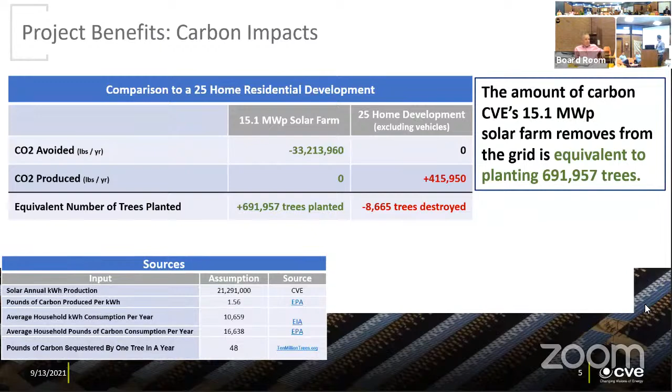Here's a slide on the tax revenues. This screenshot is pulled from the NYSERDA handbook on property tax, their recommended rates for property tax for solar projects in upstate New York, per utility. We're in National Grid territory, and they recommend $1,700 to $5,100 per megawatt AC. What we've been discussing with the attorneys and with the school district has been a rate of $5,500 per megawatt AC, already above NYSERDA's recommended range.

We've also discussed with the school district front-loading their payments, taking their 15 years of expected tax revenue and giving it to them up front. That would be $365,000. If you add it all up, it's about $800,000 in the first 15 years that this facility would pay in taxes, with the lump going to the school district and the rest split between the town and the county. We're happy to move around the funds with the host community agreement, which we can get into more detail on later.

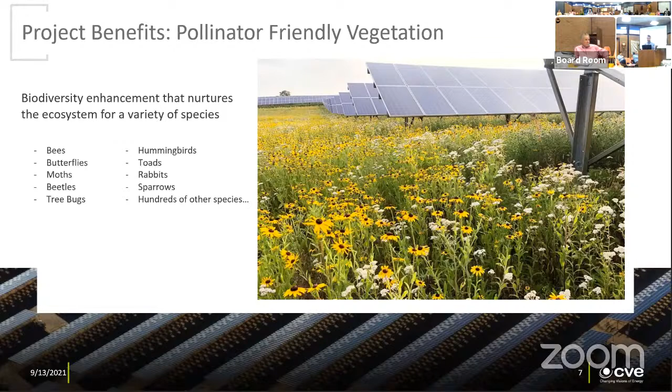Community solar: up to 2,500 individuals or homes could receive monthly discounts on their utility bills, a 10% discount, estimated to be worth $260,000 in year one. If you add it up over 25 years, that's about $9.5 million in utility savings for the community. We also have a little flexibility—given the rules of the community solar program, we can send up to 40% of the power to a single off-taker, a single customer. Instead of doing 2,500 homes, we could send 40% to a business in town, an industrial use.

So, Carson, is that $9.5 million nominal, or discounted over 25 years too? That's nominal, yeah—it's not present day dollars. All up.

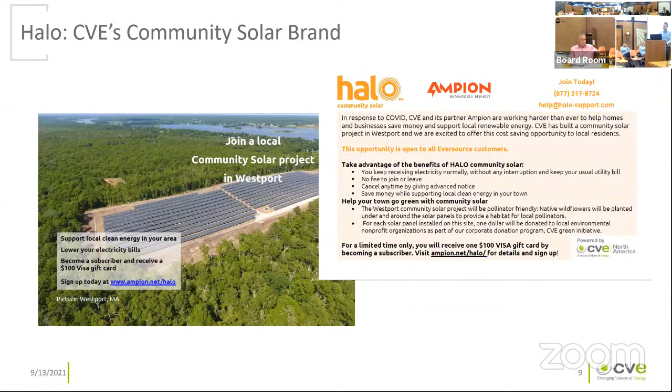Where are these panels manufactured? Yep, these panels are manufactured in South Korea by a company called Hanwha. Not in China, no forced labor—that came up at one of the meetings.

And then finally, something that's unique to CVE is we'll put together a board to come up with a local environmental cause to donate to—$1 per panel, something we do at every CVE project. So we'll be making a $35,000 donation to the local environmental cause or organization. Just wanted to get that out, refresh everybody on the project.

Thank you, Karsten. I was just wondering if you had received my questions, either over email or in the chat. They were sent to you, for each installation we do, but I had like 12 or 13 questions. You didn't get them? Did Ann Kelly email them to me directly? I'm sorry, I'm not aware. I'd have to look and see how that was.

It had to do with things like how you take care of the grass underneath the units, if they're sprayed, and removing snow from the units. How do you remove the snow? What do you do with it? So those are the type of questions I have, not just for this specific project, but for the other project we have too.

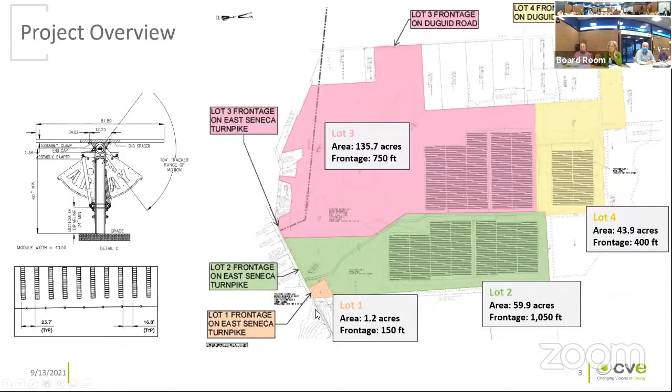And it was also explained to us that we're very close to maximum capacity, so even if it is a mile, we're not going to have a bunch that close together. I've heard that argument - people have said that to me, that look, we're getting close. We're talking about facilities that are 25 years in length, and a lot of things can change over 25 years, including capacity.

So I had asked that we put a cap on the amount of solar, a firm cap that is 50 megawatts, 55, whatever it is, as opposed to just saying that we're nearing our capacity, therefore we can't build any more, because a lot can happen in 25 years. And so I'm concerned about that too.

Carson, I have a presentation on that, on the siting. Wasn't a pretty big chunk of your connection fee upgrading National Grid's ability to handle the 11.5 megawatts? I almost gagged when I saw the cost for you to hook up. I was looking at upgrading the feeder subsets of it, and it looks like a lot of that is building up their ability to handle it, including taking your 5 megawatts down to 4.6, so you wouldn't overload the system when it was running full tilt.

I think the majority of our interconnection costs, which is about $2 million, is upgrading about a mile of power lines to accommodate this. So just to clarify, right now they don't have the capacity to take what you're generating, but with some additional investment, they could - which then creates the question in my mind that the capacity of the system today means nothing. Somebody could always put some money out there and increase capacity.

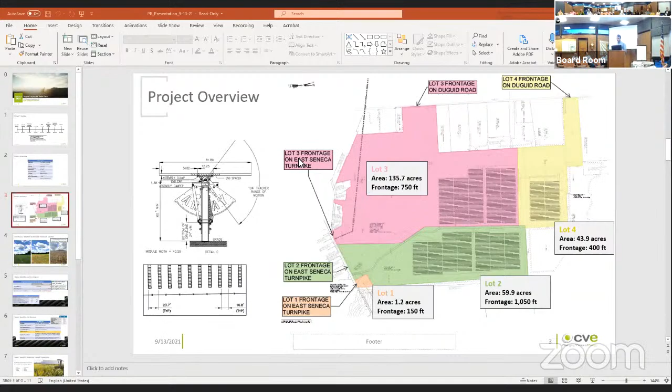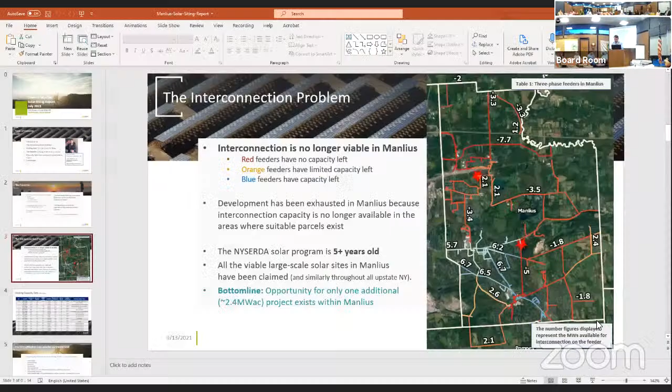So here is what I presented to the town board about the siting problem, out of the Manlius solar siting report. I was trying to prove to them with real data from National Grid, from the interconnection queue, that there's really no space left to do projects in Manlius. There's one spot in the eastern side of town that could do about a 2.4 megawatt AC project.

I quoted Rich Rossetti here: interconnection is no longer viable in Manlius. So those red lines, all these lines are all the feeders, all the distribution level power lines in the town of Manlius. All the red ones are power lines where there's no capacity available. The blue ones are where there is capacity available. There's capacity available on the power lines where it's congested, where it's developed, where the parcels are small, where there's homes and shopping centers. You can't get a solar project in there - there's no parcels, there's no space for it.

The numbers on these lines are the number of megawatts estimated to be available. So you can see that there's really nothing - where there is land, there's nothing left on the feeders based on what has been applied into the National Grid queue.

So can I ask a question? I hate to interrupt, but - does this mean that if we approve your project, the Salt Springs project can't be done because there's not enough capacity? I don't think so - that's on a different infrastructure, even though it's close, right? Already been through our...

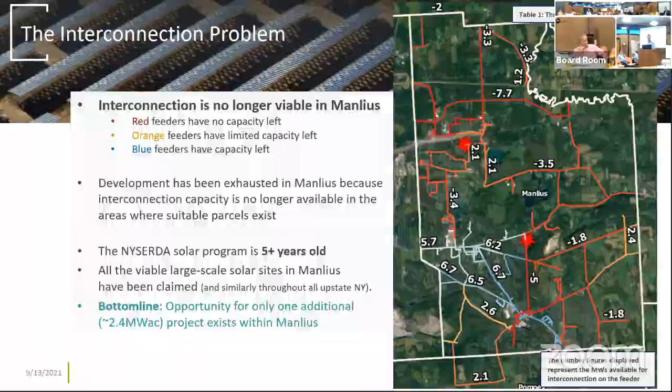Okay, yeah, both - I think you'll see these are all the power lines in the town of Manlius, their unique ID with National Grid, and the amount of capacity that they could potentially accommodate without upgrades.

So we're on this one - we could put 10 megawatts on with no upgrades. We could upgrade a little bit to get to 11.5 to really push it. And then the Source Renewables project is on a different feeder - Feeder 156, CVE is on 553. The Source Renewables project is going into the Collamer substation, we're going into the Duguid substation. So these are on a different set of infrastructure.

So this shows you the total solar on the feeder, the amount that this feeder could accommodate, then stats on the substation. So you see here what's available on the feeder and what's available on the substation - you need both of them to line up to have a viable site. So where there is capacity, there's some that do have some space, like these in blue.

But if you were to zoom in on this area where this feeder is, there's no parcels. The land use is restricted, parcels are too small.

You send that to Sarah Ballinger, that's head of this solar working group? Because that would be very helpful for our planning going forward. Yeah, she has it already. You could send it to the town board. Oh, you did already? Yeah, I did already, and I went through it with them.

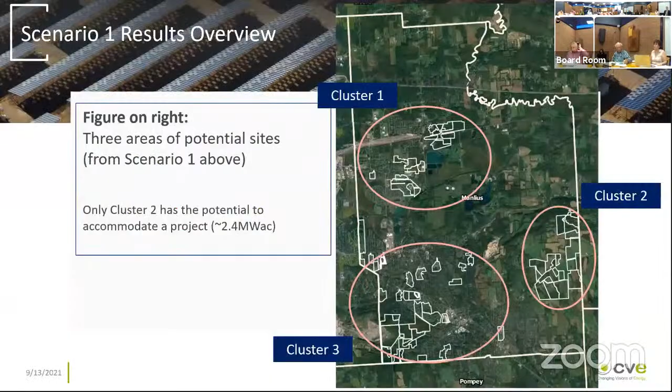This is my last comment, I won't say anything more on this project. This is just coming from me as I look at what's happening here. We've got the public hearing open right now. We'll probably close it or talk about closing it. But we have a subdivision. That is one of the pieces of the puzzle.

If we approve the subdivision, in my opinion, we then need to have 3 separate public hearings on site plans and special use permits for the different projects, because I'm of the belief there are 3 projects. Others may not agree with me. That's how I look at this thing.

I've been told that we can look at it as one project and do a site plan for all 3. I have never been involved, in all the years I've been on the planning board, we have never done a site plan on multiple projects at the same time, or multiple parcels, I should say. So I think we should do an individual site plan review of the 3 different parcels, not all together, but individually. Again, that's my opinion. I throw that out there, but I've never seen us do that in the past.

I spoke my piece. I think we're going to have to really come to... first of all, I would recommend tonight that we declare this a type 1 action. For that purpose, I can send out a single notice. It'll involve the subdivision, it will involve all projects, whether we end up bifurcating them or whatever we do later. So that would be my first recommendation for tonight.

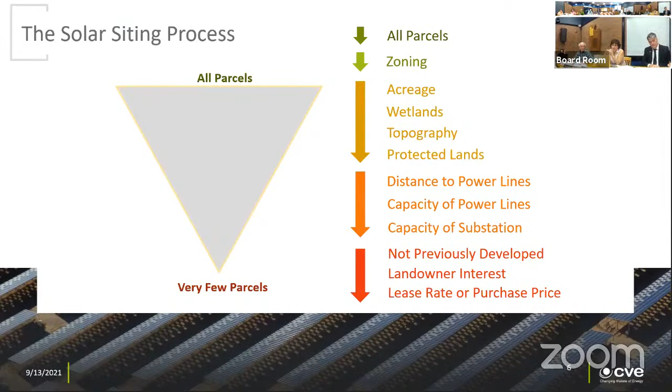The second thing is there needs to be a discussion amongst this board, because you guys are the only ones who are going to make that determination as to whether this is separate projects. Lastly, if it's determined that they are one project, I feel that we can look at them all at once, all as one. I don't have a problem with that from a procedural standpoint.

Even if they're separate lots, so to speak, separate parcels, I can work that and work the language.

But then the question is this: is it separate projects? If it is, we're going to have to make findings about that distance. If it's all one project, it appears we still may need a finding about the distance vis-a-vis the other project that's already in process. So those are just some threshold considerations.

I don't feel like we're back at square one. We certainly are not, but we're not as far along in the process as we would like to be. But it's the nature of this.

So at this point, do we have, Allison, more? Yes, okay.

Bill Rosinio says, how much carbon is emitted to manufacture and transport the panels from China? Do you consider that a part of the supply chain? And CVE is installing trackers, but they are showing land-based panels in the presentation.

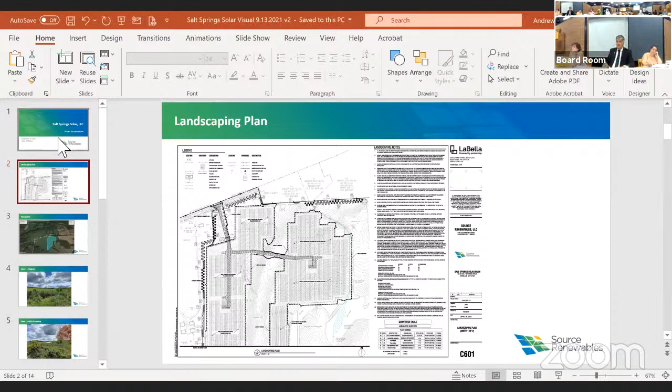Okay, my name is David Morocco. I own the land at 8490 Salt Springs Road, approximately 55 acres. It's just below this proposed project. I'd just like to ask this planning board if you are truly satisfied to date with the review of this particular project. I know a lot of questions have been asked, emails have gone around, and I don't know if you've got any answers, because I don't have any answers or clarification on some of the questions that have been asked by the neighborhood and by the board. So, you know, it's really about how much information have we received that I haven't been able to get my hands on. So I'm very concerned, and I'm going to run right down this.

So, view shed - can you screen this project ever, no matter what you do with the buffer? I saw one proposal, I haven't seen anything else. The project's impossible to screen, in my opinion. Our water source - this project was answered differently, but this project's over our aquifer, it's my only water source. We have 4 wells downstream to this, one is as close as 50 to 60 feet away from a set of panels. Very concerned.

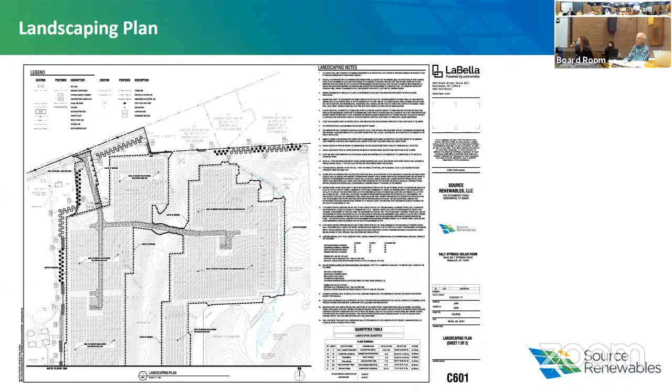That doesn't come across in the artist drawing that you're showing us. That looks like it's way up the hill by this time. Well, what I can do is go back to the...

So I don't know how big you're projecting those trees to be when they're planted. I think the last time, the plan showed a mature height of the trees, but my recollection was it was either 6 feet or 8 feet at planting. Yeah, that's the plan, and then they grow. It'll grow, but...

Okay, I guess we keep going. I think those trees have to be 50 feet tall to screen it, because I've been... not, yeah, sure.

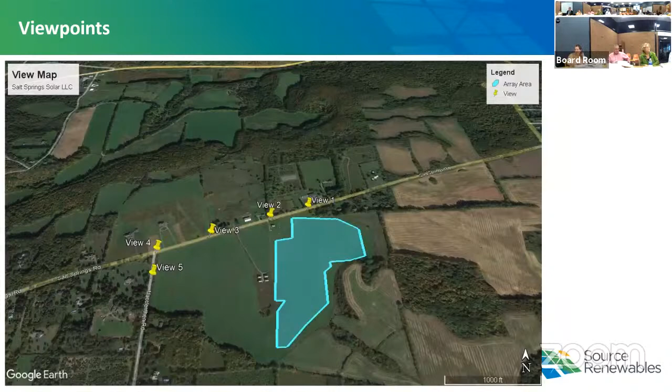Do you want to add anything else? That is what it is. I would have to provide additional information. All right, that would be helpful.

I have a question on your environmental assessment form. You said the disturbance is plus or minus 2 acres, but in light of the last presentation, is that accurate? Yeah, that's with regards to the permanent disturbance, and that takes into account the road coming in, which is a pervious road, so that doesn't go into the calculation.

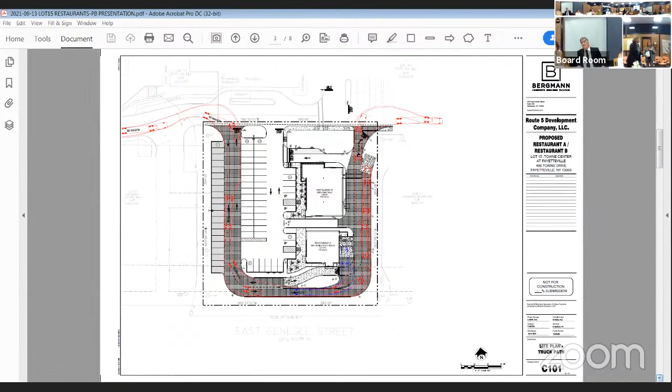Have you given any thought to whether there should be a walkway? I just want to make sure you're talking about a walkway on Genesee Street? No, on your property, but adjacent to Genesee, like the one, yeah. So I was at those planning board meetings and what they were telling me, and I have them here, is that after this development, for future development, they wanted somebody to look at the internal circulation as well as the sidewalks on Genesee Street and North Burdick Street and all that.

I think those are a much bigger town issue. They're not a core development issue per se. I mean, I know that there's plenty of money out there for sidewalks, and you have the DOT and the county, and you need their participation, but when you create a sidewalk and it doesn't go anywhere, you create liability too.

So if you're dumping somebody at the end of court property, what happens to them if there isn't a sidewalk to take them any further? We have brought everybody into the center as best we can through the park, and once you get in the center, there's people who don't always like the way we've circulated them, but they do have the ability to walk throughout the center.

So we do not feel that this project, the internal site plan for the town center, makes sense to be held up by a sidewalk along a state road, because we think that's a bigger issue. We think that's a larger town board issue where you'd want DOT involved, because if you just put a sidewalk there with nowhere else to go, I don't know what kind of liability we're creating for ourselves.

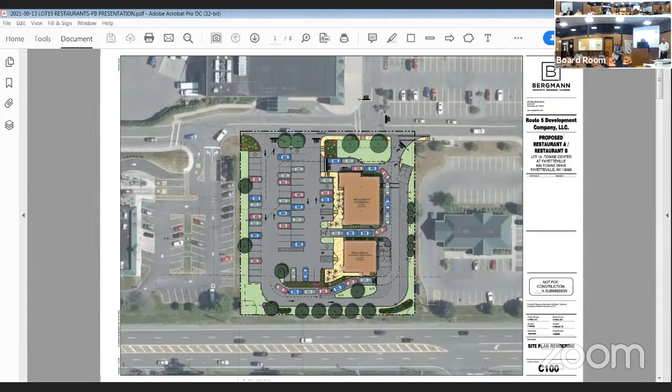So before we continue the public hearing, I am going to open it up to the members of the board if they have questions about this new plan. I like it, I like the plan. I agree, it's much better than what was in front of us before - less confusing and congested. Yes, cleaner, you did a good job.

We had some associated elevation changes as well - similar language that's consistent throughout the whole center, but we introduced a few other materials that highlight the entrances and drive-throughs, just to kind of lighten the building up a little bit.

The top elevation is what you would see as you're looking east from McDonald's towards Key Bank. And the bottom one is what you would see from Key Bank looking towards McDonald's, so just to orient you. And the lower right, the second one from the bottom, is what you would see from East Genesee looking towards Restaurant A.

So number one, flipping it helped. When we were going parallel to Genesee Street, you had a lot of back of house on Genesee Street. Now by turning it, it's better, and I think it's even better when you separate them too - the visual is improved as well, not just the circulation. If we eventually approve this, we're not approving the signs.

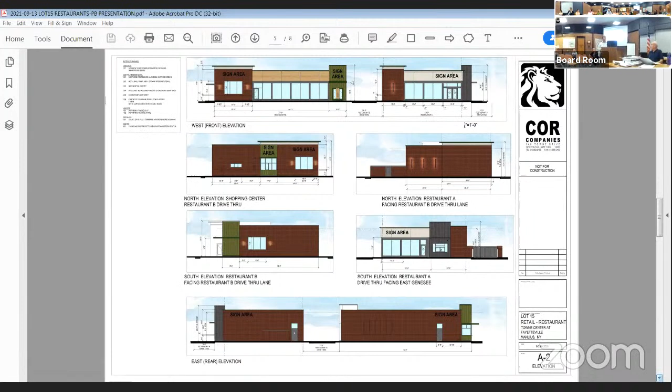One of those was to reach out to the DOT about putting a light or entrance toward our subdivision, which we were told is not possible because of the proximity to the light going to town center. They said we could not have a light. They did offer to do a study for us, which I said we wanted, but it's gonna be at least a year for them to do it because of the backlog. So it's gonna be at least a year. I did forward all the email to Lisa, which stated all of that, to forward to the board. I'm not sure if anybody read it.

Another thing I did was reach out to the Manlius Police Department on accidents that happened on Genesee Street. On the 7200 block of Genesee Street, which goes from the East Side Dental Specialist to Mott Road, from January 1st 2020 until July 2021, there were 9 accidents reported. Those are accidents where a police report was filed. On the 7100 block, which goes from Draycott Road to just past Shep's Funeral Home, for the same time frame, there were 8 accidents. So that's 17 accidents in 19 months.

And in those 19 months also includes the time where basically the county was shut down, where there was no unauthorized travel. So if you take out those 2 months, that's 1 accident a month. That's a lot. What caused the accidents? I did not get detailed reports. I asked for as much detail as possible, and this is what I was given. But these are all accidents that required a police report, so it wasn't like somebody just bumped somebody and looked at it and said it was okay. Is there any related to your subdivision?

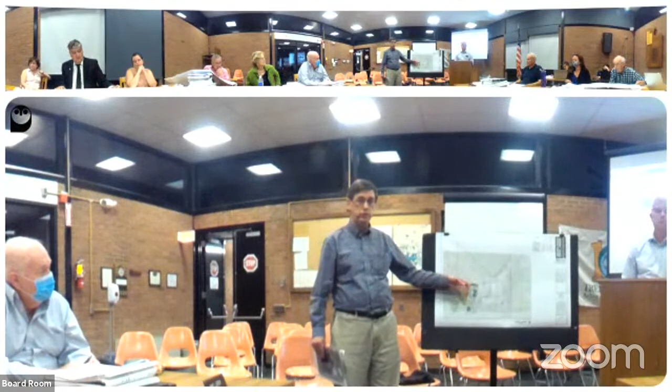And as we go back, we're coming up against a natural hedge which screens this area to the rear. The desire was to keep the existing hedgerow, so to speak, and allow parking in front of it for the clientele.

I understand all that, but the fact is you still need more parking than the 10 spaces. And there's got to be some kind of formal agreement allowing at least the employees to park somewhere else, because a 3,000 square foot dental office, you're probably going to have 10 employees.

I can't speak to the doc, but typically there's a few aides, one doctor, and office staff. Maybe dental assistants, dental hygienists. As I understand it, it's mostly orthodontics, not a traditional dental office. I understand, but you're still going to have hygienists and assistants.

You have to bring a lot of fill in there. Yeah.

It's not the large building, it's a two-story building, so we'd be concerned about the parking for that building.

Yeah, I had conversations with Jeff Miller. He would be here tonight, except he's traveling and coming back from out west, so he wasn't able to make this meeting. He called me and we did talk about that - the parking would be an issue.